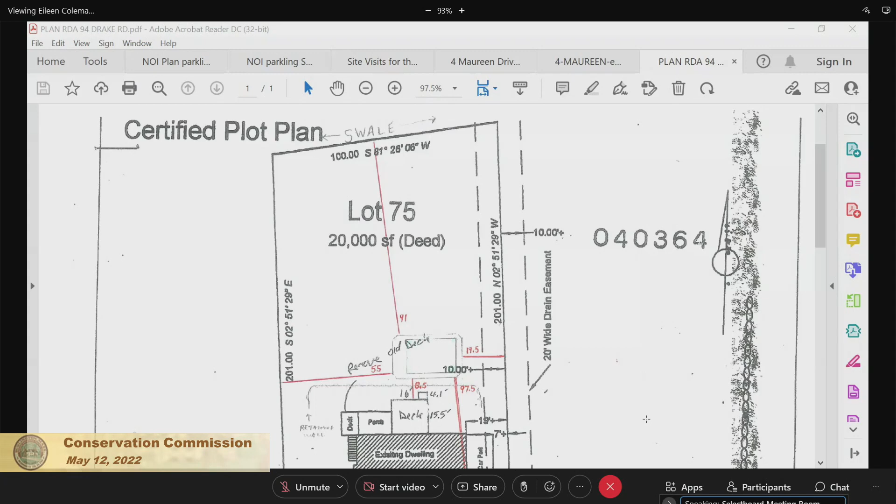My name is Peter DiBernardo. I'm with Gibraltar Pools in Topsfield. We've been in business 37 years, and we build above-ground pools. We're proposing an above-ground pool at 94 Drake, and it's going to sit behind the retaining wall. We'll bring in a machine to level the ground—it'll probably be there for about 45 minutes—and then the rest of the work will be performed by hand. The filtration system is a self-contained cartridge system, so they will need no backwashing of treated pool water into the yard. All the water will stay within the four walls of the above-ground rectangular pool.

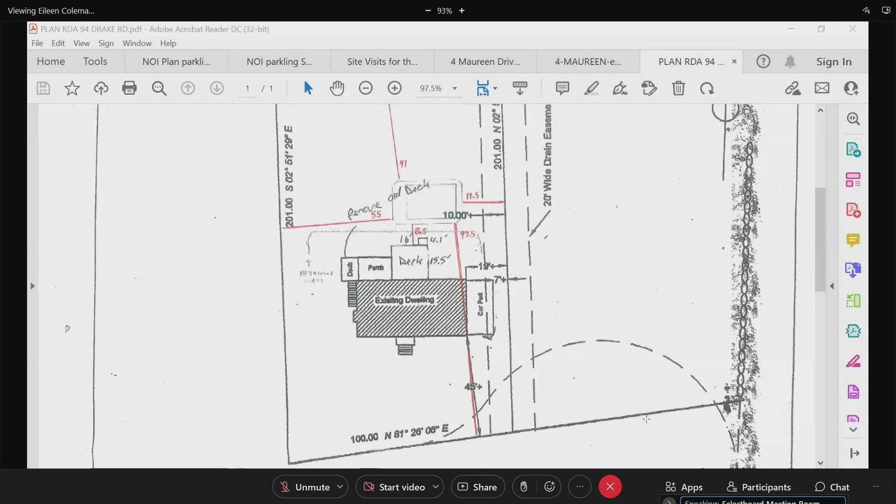Okay, thank you, good summary, very concise. John or Eileen, you have some comments on this one? A few of us were out there. So yes, we did go out there yesterday, and it appears that the wetland is not really very far beyond the retaining wall. It looks like the grading for the pool would probably be into or at the edge of wetlands. The wetlands aren't flagged, but it does appear that there's been some vegetation cut—some small trees, some larger trees—cut in the wetlands, and it looks like the pool itself would be very close to wetlands.

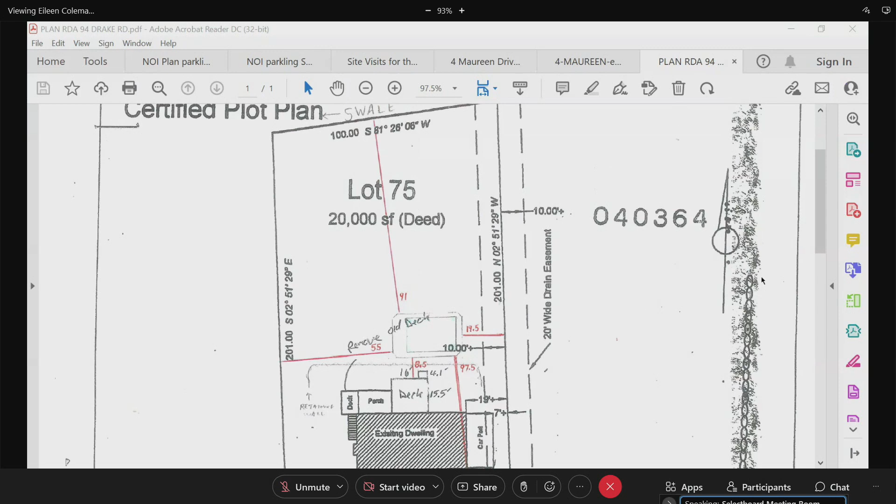All right. I was there as well, Ed was there, I believe. So, my question before we move on—it was so close to the wetlands and the slopes—did you feel that it maybe is more proper to have it as a notice of intent?

Right, well, I think the wetlands need to be flagged, and the pool location needs to be worked around where the wetland boundary is. The wetland boundary may not be a straight line across the back, it may be irregular, in which case the pool location may need to shift. But if it's within the 40-foot no-build zone, I would recommend you not approve it as a determination of applicability. If you were going to grant a waiver, it would have to be under an order of conditions. But it may be possible to get it outside the 40-foot, I'm not really sure, until the wetlands are flagged.

Okay, all right, let's see where we go with this. How about tree cutting? All right, so Kent, do you have any comments on this one right now?

Just on the pool, are you going to be doing some type of border, since it's going to be deeper? I know, because I have one at my house, so is there going to be a certain amount of rock that goes around the pool too? Is that going to be like a border?

A lot of people put a mulch border or crushed stone border around the pool, probably not more than 24 inches around the edge of the water. We've got a cantilevered safety ledge around the pool, so it would probably mimic that. I don't think it would go beyond that, so it'd be just over the overall footprint of the pool. So it'd be probably a couple feet from the edge of the water, but on our diagram we've got the safety ledge built in, so it would mimic the outside dimensions of the pool structure.

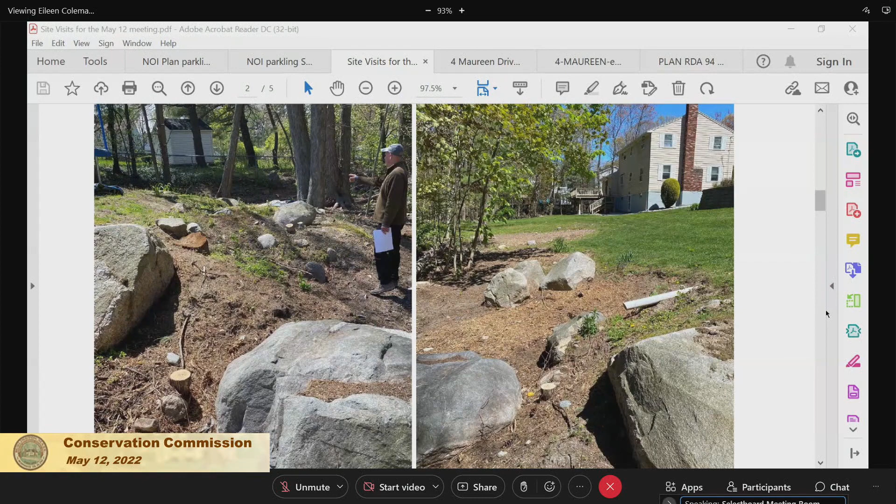It was a little bit unclear whether they were going to build up the wall to avoid any damage, or do a cut instead. And how close the cut would be, whether there'd be any damage to the wall, because the wall is like this, and then there's a slope off the wall like this - you can see it in the pictures. So there's two ways of doing it. I didn't know if they're going to bring in a machine and cut it to make it level, or split the difference with a slope like this.

I've been to the site myself, it's not too dramatic a slope for us. We'll flag off the four corners of the pool, dig in from the lowest corner, then bring the earth we dug from the top. Ours is an above-ground pool, but it can be backfilled to a certain degree, so we'll make a pad kind of midway at the slope. So you'll basically compromise, half cut the slope - it's a compromise into the middle of the slope. Yeah, okay, I see.

The top will be set back. We won't be anywhere near the retaining wall, so that won't be compromised at all. That makes sense - not only on that side of the pool, but on all sides, and on the side next to the retaining wall, the edge of water or pool wall will be another 2 feet away from that. So the edge of my safety ledge is what will be closest to the wall, then you have another 2 feet. That retaining wall is there to stay - we won't undermine it at all.

Okay, got it. Sorry to interrupt. No, it's okay, I appreciate the explanation since I wasn't there. The other question I have is, as far as a 40-foot no-build, does an above-ground pool like this require a building permit? Yes. Oh, it does, so that would certainly take effect then. Okay, so then I agree, it should be a notice of intent and the flagging of the wetlands.

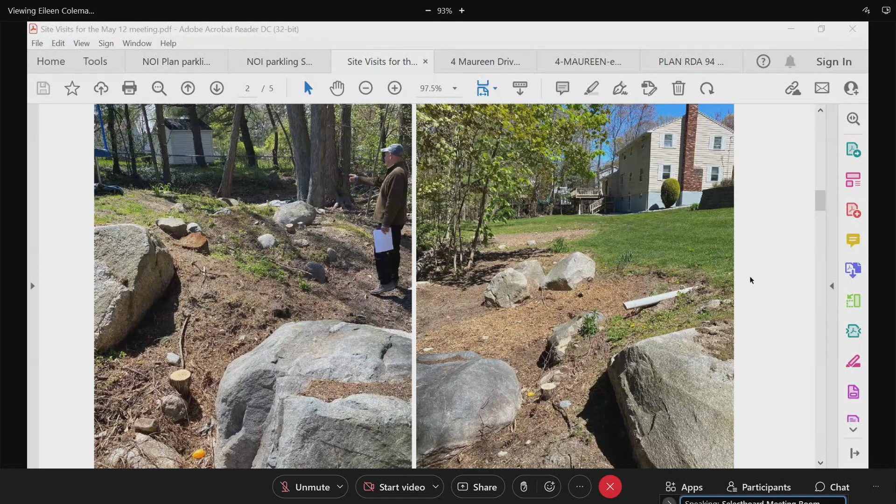If the wetlands get flagged and the pool is proposed to be 20 feet away, I'm not sure the Conservation Commission would approve it. They have a 40-foot no-build, and you'd be in the 20-foot zone. So it's probably premature to talk about mitigation until you know how far the pool would be from the wetland. But that's something for the owners to think about.

I'm sure that's something they would agree to. If we had the proper distance, we wouldn't need to be here for a conservation permit, obviously. That's right, that's what calls for it. So I don't know if you're saying that if it's 20 feet, it's a definite no.

I wouldn't mind continuing to the next meeting and hiring somebody to flag the wetland. That wouldn't be a problem, but much beyond that I think it wouldn't be an easy thing for the homeowner. We're happy to continue to the next meeting, and maybe they can get someone to take a quick look at it.

So if a wetlands person is hired to flag the wetlands and we come back to the next meeting, and it's 20 feet or 25 feet, do you think they might get an approval at that point? Or would it then be a recommendation to do an NOI?

The 20-foot zone, first of all, if it's in the wetlands, then it's not likely to be approved, obviously. The 20-foot is called no-disturb, so you're not allowed to disturb, and it would be questionable whether we'd even grant a waiver for that. The 20 to 40 foot is a no-build, and there we might grant a waiver, in exchange for a few more trees planted or something like that. If it's more than 40 feet away, no waiver is necessary and there's no issue. So it's that 20, 40, and greater distinction that matters.

The best thing is to continue to the next meeting. We'll get it flagged, I'll submit it to Eileen, and then I'll be back. I think that's the best approach. So, do we need a motion to continue? Yes. Is there anyone in the audience for 94 Drake that would like to say anything on this?

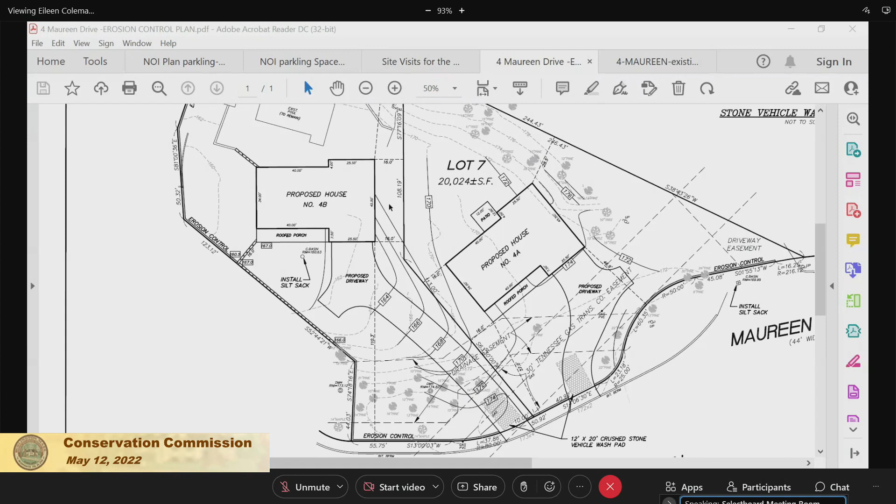As we discussed yesterday, regarding existing drainage on site, we did a little more investigating, and all the existing drainage structures are bottomless with stone underneath the dry wells. We're possibly proposing to keep the existing drainage in use with the new driveways, because we're decreasing our runoff by almost 27%, from 19,105 to 13,900 square feet. So we're decreasing runoff quite a bit.

That's the total for the 2 lots? Yeah, existing runoff on this site now is 19,105, and with the 2 new proposed houses and driveways we're gonna be at 13,900. Because we're gonna try and save the existing in-ground pool on one of the lots for one of the houses. Okay, good, thank you.

John or Eileen, one of you want to give us a rundown on this one? Well, only me, and I don't have very much to add from what Tim said.

There's one large existing house on a very big lot, and he had enough room to split it into 2 without going through a formal subdivision process. As Tim described, he's proposing to reduce the impervious surface by a lot. My main concern is that he's not proposing any additional stormwater management. As he said, the existing system appears to infiltrate, so maybe it isn't necessary, but I think that's something we need to consider.

That's about it, so it's a standard stormwater permit obviously under your hearing. Okay, all right. Ed, why don't we start with you? Do you have any comments on this one?

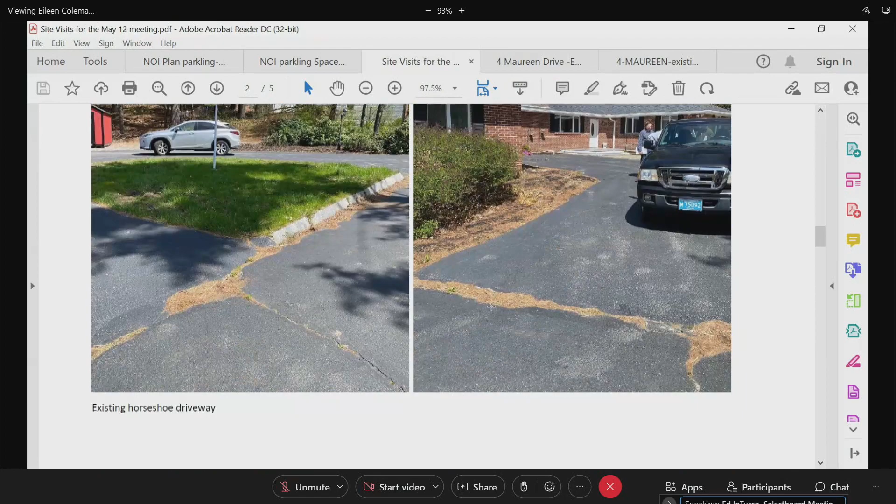My first impression was clearly to see that house go that's there, it's a beautiful home, a lot of history probably goes with that. We heard some of that already. But overall, I was impressed with the drainage and everything that was done early on throughout that whole area. I'm pretty much happy with all the work being done in preparation for this, but maybe the drainage is the only thing that would be the ultimate concern: do we go with what's existing there, or do we improve something on that?

Okay, next is Don. Yeah, I don't have any further comment, it looks doable.

Okay, Kent. Sorry, hard to ask about the drainage - what about trees, is there any more trees being taken down? Not a lot, we have a few dead pines in there, and there's a gas easement that runs through on the street. We'll probably take those, but anything along the street, is everything staying as far as a buffer goes, from probably the edge of the road, probably 30 feet in.

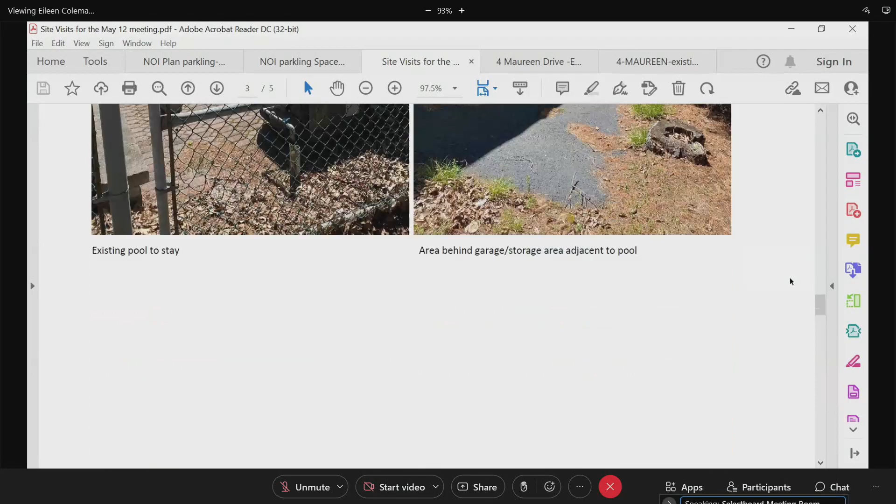Yeah, I took a drive down there today, there was a good chunk of it - all the trees as you start going around the right side? All that's staying, nothing's getting touched on that side. They're all staying, the ones on the right side? Yeah. And the ones in the front are staying too? All the ones in the front, except for I think 2 dead pines out in the gas easement.

So on the proposed plan, I see all these trees - these are all things that are there now and they're gonna stay? There's maybe 1 or 2 on the very far right, on lot number 7, maybe a couple small pines and maples at the bottom of the slope, but we're trying to stay away from the slope completely, so we're not regrading or getting into that slope at all. Trying to leave the grades pretty close to existing - no major cuts and fills.

All right, as you can see from the pictures, it's pretty bare on the inside because there was so much impervious in the house, as it is.

Bill? We did have the drainage system cameraed also. And everything seems to be in pretty good shape. We have one cracked pipe that goes back to the existing house, which we have to cut and cap anyway to run new pipes into it. So anything that needs to be cleaned or repaired, we're obviously going to do it. Even on the drainage system on the street, if it needs to be cleaned, we're going to clean it. I'm not sure if it's been cleaned in the last 30 years, to be honest with you.

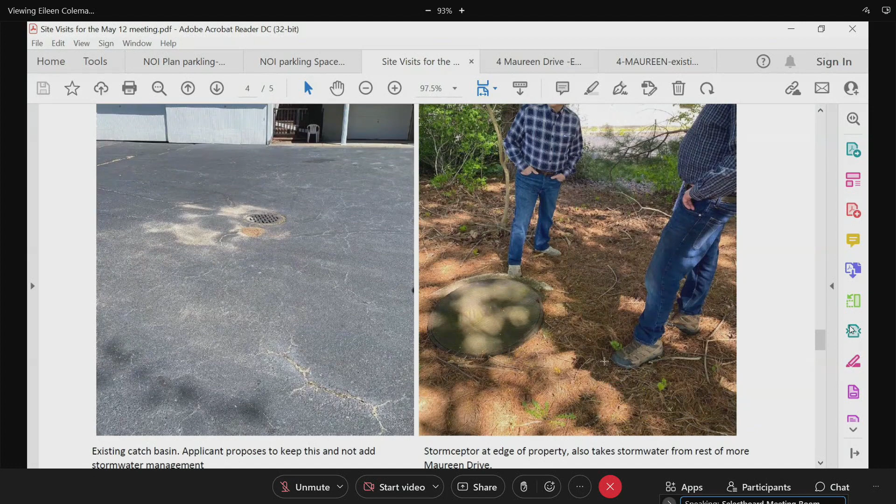All right, Bill? I'd like a little more detail on the drainage. So the two houses, the rooftop runoff is going to do what?

We have two existing dry wells on site that take the existing driveway and roofs, and we're basically gonna run the two new roofs and driveways into those dry wells.

And I see there's a catch basin on site as well? Yeah, that one that's in the driveway, that's basically a big dry well in the driveway. So we're proposing to use that one.

And then there's another one further down, and there's also another drain manhole. There were two different subdivisions here, one in '76 and then one in 1991. There was a drain manhole in front of the house that got turned into a dry well, because that drainage easement got abandoned when they did the new subdivision in '91. Actually, that's when they put in the newer drainage system for the street. There's two catch basins that go into the drainage system for the subdivision.

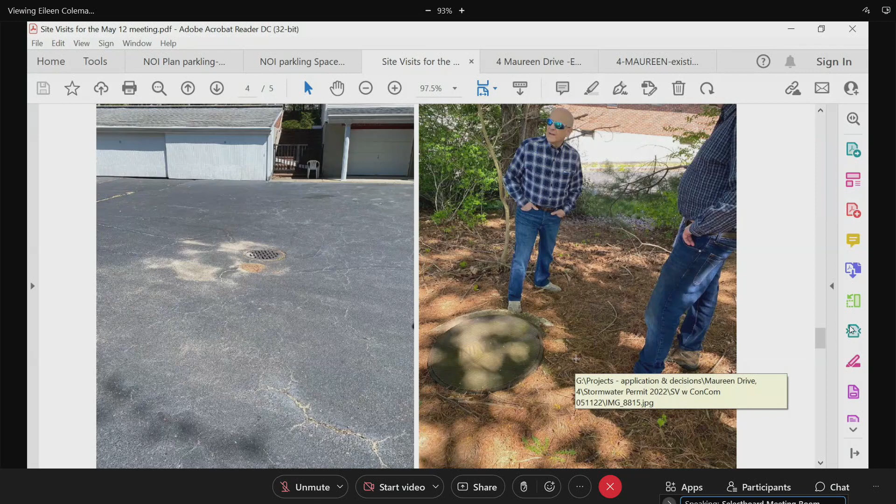So those catch basins drain out to the street, and that's what you cameraed? No, we're keeping everything on site, but the catch basins in the road, this drainage easement on my lot, is for the subdivision. There's three manholes, and they're basically oversized dry wells that catch the street water. And the existing catch basin there is basically a dry well. So we're proposing to use the existing dry wells on site for the roof runoff, so all the water's gonna stay on the site, and the site's pretty much a bowl anyway. Everything's staying on site, very little likelihood of anything flowing out.

Is it clear where the one for this lot is? Where is the catch basin here? I can't see the second catch basin. We don't see a second catch basin for lot 7. How is it being handled?

There's a drain manhole up here. Oh, that's on the street though. I'm not sure if it's in here. Yeah, there's one that seems to be on the street. It says rim 169.95, but I don't see anything for that house on the right.

We've got one at 173 that's to the left, another one at 174, and I think there's a third one. There's three drain manholes, and one of them is on lot 7. There is one on lot 7? Yeah, there's three of them. Is that on the drawing somewhere? Yeah, I'm looking at the old existing plan, because I'm not sure if he missed that on the new drainage system. That could be existing.

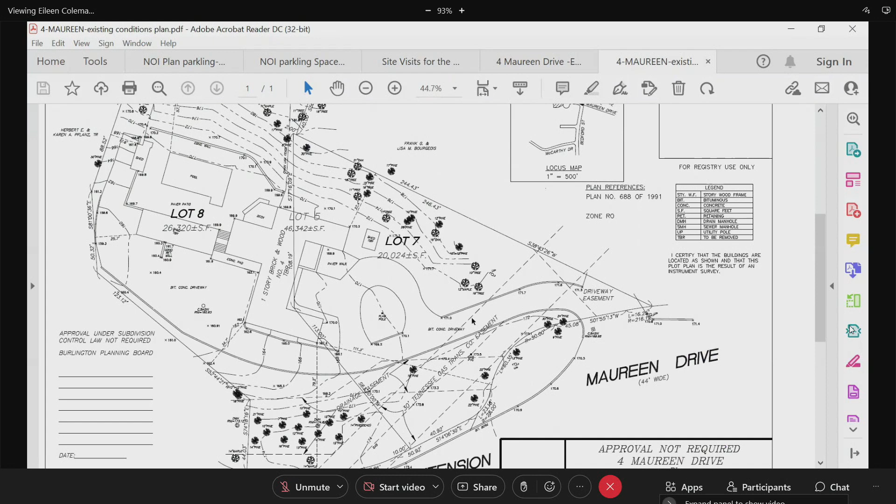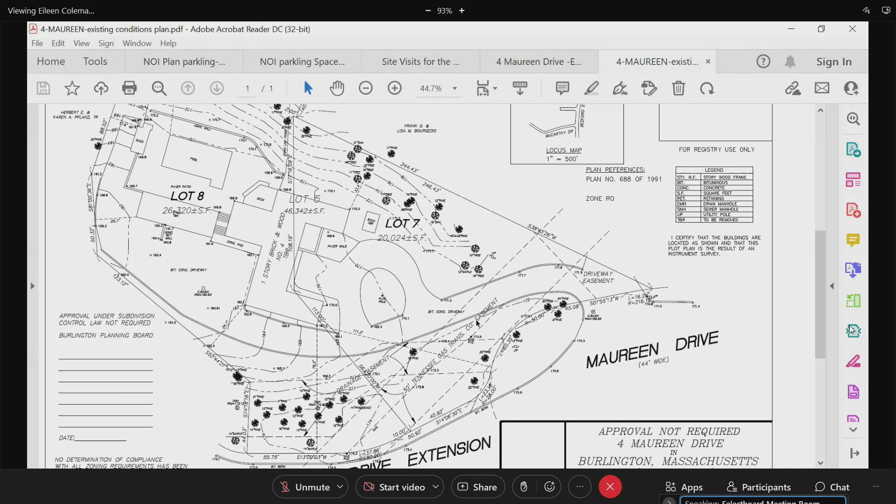I think it shows in the old abandoned drainage easement. That's the old thing. There's one here, this is the one that's there. The one on this side, I don't see anything right here. That's one right here, but I don't see anything connected.

There's a catch basin shown in front of the driveway, and then there's a drain manhole over just off your property on the left of the existing drawing.

I don't know if you guys have the subdivision plan from '91? Yes, I do. Well, if you see that little circle, it says C detail A below. That was the existing drainage easement that got abandoned, and then the new drainage easement got put in.

There's a manhole in that drainage easement, almost right in front of where the little cul-de-sac was on the driveway. But before that starts to go down, there's a drainage easement up there, there's a curving drainage manhole on the left. I found it, I think you missed that one on the new plan, to be honest with you. Drainage manhole, right here. Oh, there it is, there's a manhole there. Okay.

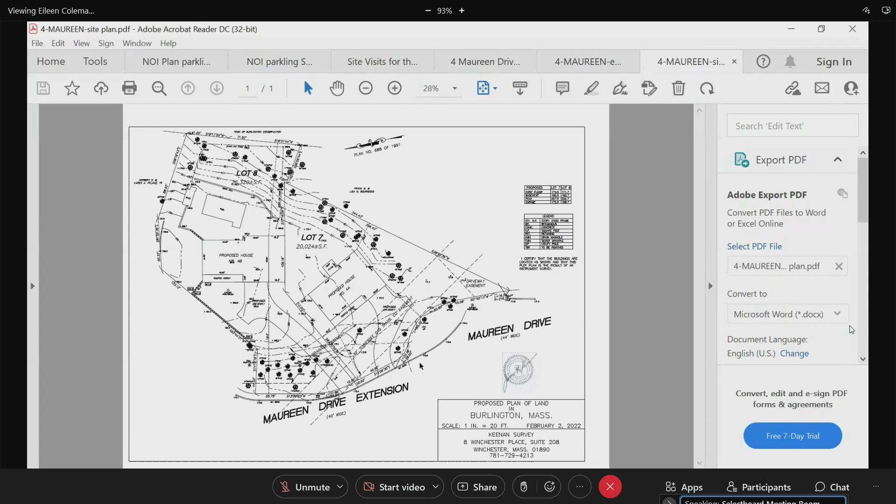Drainage easement, yeah, okay. All right, so, Mr. Quinn, here's the thing. What I think we need is a little bit more clarification, documentation, not clarification, documentation.

It would be a couple of things. I'll ask our staff or the commissioners to jump in if I'm getting this wrong. I think it would be nice to have a drawing that shows the roof leaders coming off and being connected to what. So if somebody's following the drawing, they know this roof goes here, this pavement, the grading will show the pavement, and so forth. It's not clear where everything's being connected.

I believe you. But particularly on the right-hand side, there seems to be an absence of information there. Okay, so that's one thing.

The second thing is, they did a scope and a camera. It would be nice if we could clarify which catch basins or open-ended drain manholes are infiltrating. It would be nice to have some verification from the engineer that for the amount of water going into these things, it is sufficient to infiltrate, and we don't need additional supplemental, and to have documentation on file that says that.

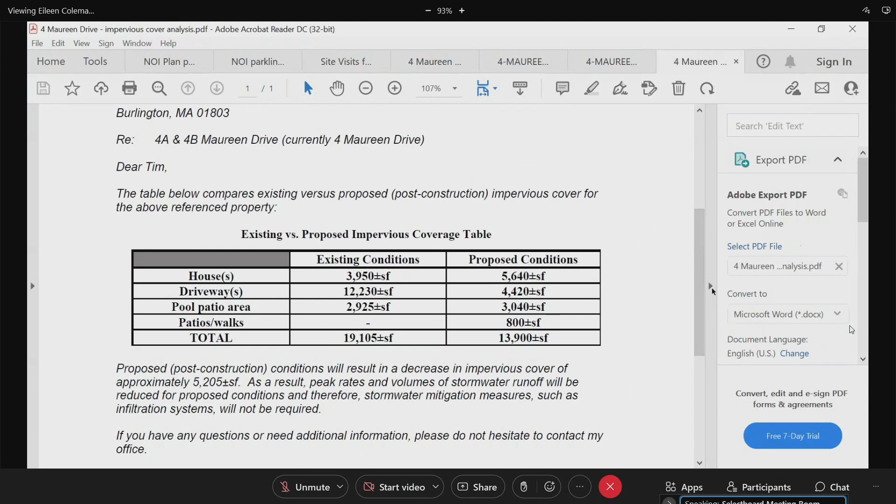I think it basically says that because the amount of impervious area is so much less, there will automatically be lower peak rates and volumes in future storm events. So since it was handling the larger amount well, it should certainly handle the smaller amount, basically.

They're really just saying that since they're reducing the impervious area, peak rates and runoff volumes will be lower than existing, which is really what they have to show. But existing is a huge swath of impervious. This has the feeling of being anecdotal, that because it's less, it should be okay.

We should have—what I would have asked for, and I don't think this is a lot to ask for, is something that shows here's how much volume is there, we measured it, and here's how much is needed. We have sufficient infiltration capacity and don't need anything additional. It'd be nice if it was a little bit more quantitative, that we have something that just says that.

Yeah, so we'll add all the downspouts, driveway drains, anything like that, showing where they're going. They know how to do it, they use dotted lines and stuff like that. And that would clarify that we don't need anything additional.

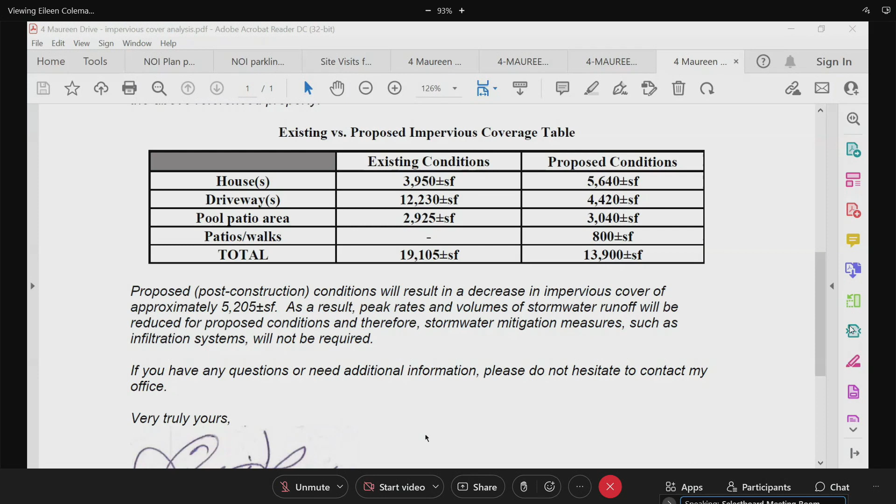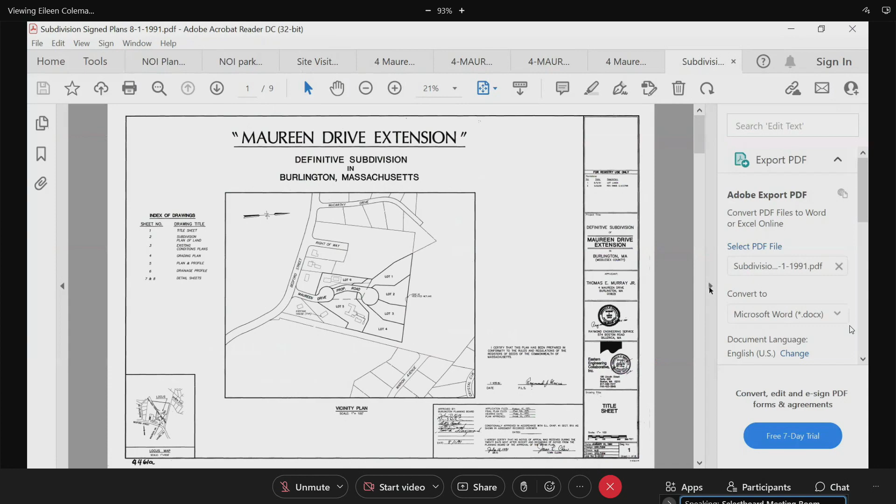And again, if it needs to be cleaned, which it probably does because it probably hasn't been cleaned since 1991, the only thing you may need on the site is to have it cleaned to restore the capacity. I was told by engineering that it is maintained by the town, but we can't find any documentation for maintenance records, which is, you know, a comment.

So if it needs some cleaning, we can clean it up. This is it, isn't it? This is the system?

Yeah, so they're really, really deep. They're 18 feet from the manhole to the bottom. There's 3 of them. They're pretty deep, a lot of capacity.

What is 18 feet deep? The drainage system, that recharge system, yeah. The manholes that we looked at, those are 18 feet from the rim to the invert.

So, does anyone have anything else that would be needed for this application?

Are you and Eileen satisfied that the erosion controls look set up in the right locations? Well, I didn't really look very carefully at that, but we'll say where the erosion control should go.

I just did have another question, if that's okay? Go ahead. Anywhere that it's not impervious, are you just proposing to put in lawn, grass? You're not doing any extra plantings, no shrubs, you're just leaving your buffer?

We're going to leave the buffer along the street, and then possibly something where that gas easement's wide open, may put something in there, but I think it's limited to what we can do on the easement, because they seem to go in and cut everything down. They clear cut the easement, but probably maybe some arborvitaes on the lot line separating the 2 houses.

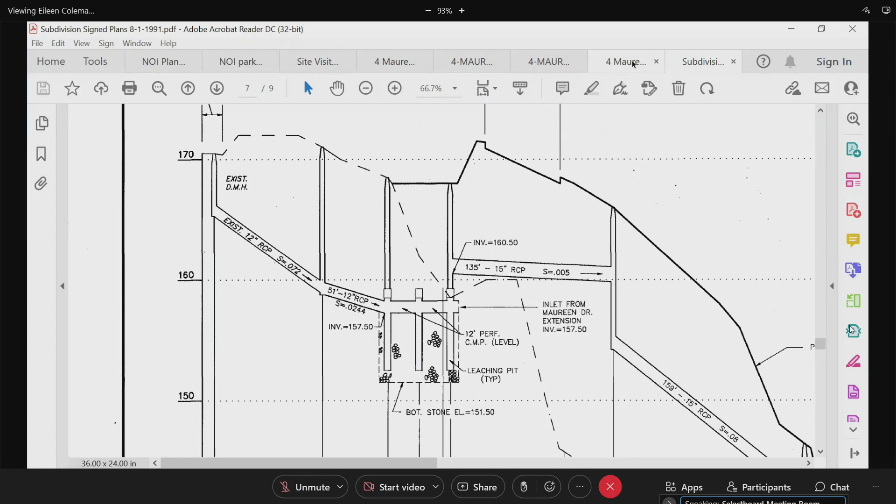Yes, on another topic, how are you going to heat these houses? Electric heat pump, solar, what are we going to do? Step into the 21st century? Good question.

Probably definitely no natural gas, because it's not readily available. Right now the existing house is on oil. So typically, if I do a new house, there's no natural gas, we go propane. But I just recently built my own house, and I put in heat pumps, and they work pretty good, as long as you spray foam everything and insulate tightly.

Massachusetts is already talking about an initiative to get rid of 1 million houses that are on natural gas. You're condemning people to a system that's not going to be very viable for a long time if you put in natural gas.

So I would recommend, if you can swing it, to put in the heat pumps. They're very, very energy efficient, lowers your bills quite a bit. I think it would help sell the house too. Well, people are getting more educated on the energy codes, so green is good, definitely helps, absolutely.

Okay, thank you. So, is there anyone in the audience for this project at 4 Maureen Drive? Anyone online? Yes, please come up.

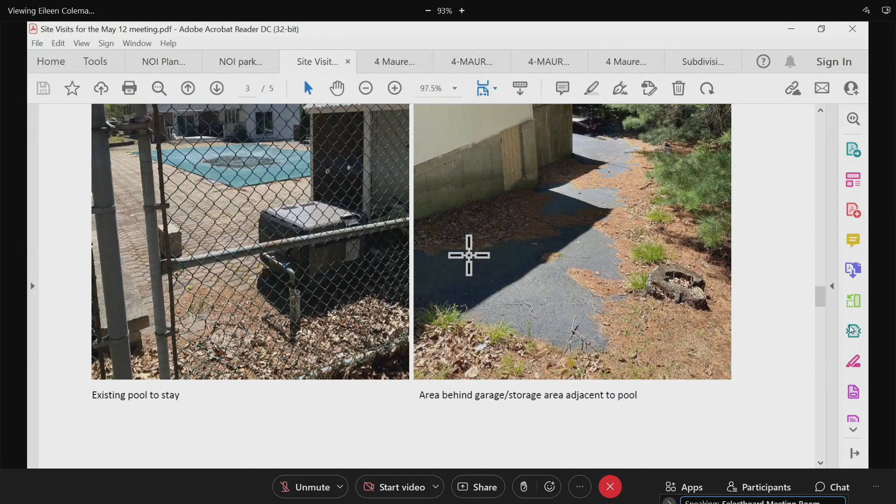Trying to see if I had a picture showing that edge, but I don't think I do. Yeah, that's the catch basin.

Sir, did you get your question answered about the cutting of vegetation and the positioning of the wall? Tim and I, I should say the builder, had talked a little bit about it. He mentioned roughly where the wall went. I wasn't sure exactly where the lot line was at that point. Am I kind of misinterpreting that?

To the left, right where the cursor crosses now? Yeah, pretty close to where all that granite curbing was running down the driveway, and then the slope started, because his road frontage basically goes all the way up in front of us, so I can't touch any of that. That's the only reason we proposed the wall—I can't go in and fill that little swale. It's his property, so that's why that wall's there, to leave the existing grades the way they are.

So the concern with the wall—say it's 5 feet, 7 feet—my lot is a little bit higher there, but I'm afraid there might be a gully there. Nobody wants a 7-foot wall right up against their property, but there might be a gully there, and that additional runoff would go into the storm drain that's not shown here, that's on my property. So that's the reason I centered the conversation around the wall itself.

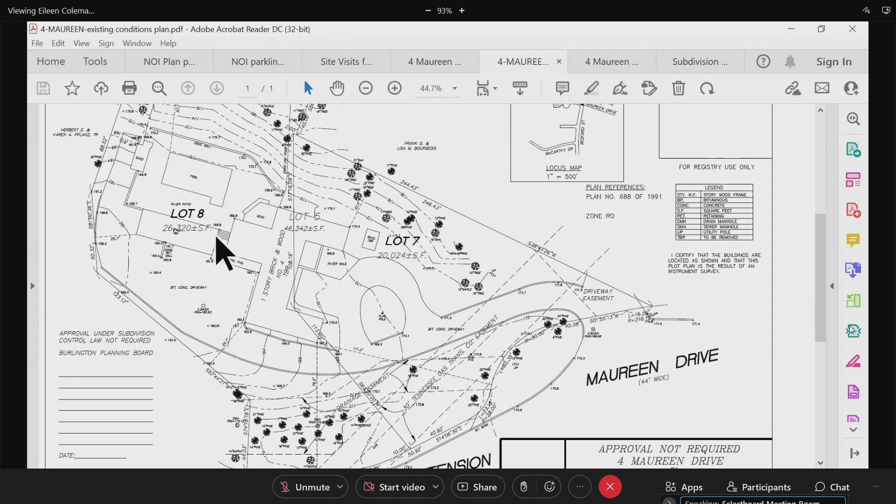All right, thank you, this is good, thank you for your comments. Is there anyone else who would like to comment on 4 Maureen Drive or has a question?

Okay, so I guess we will continue to the next meeting. What we've asked for is, one, a drawing that highlights a little better where the runoff is going, the drainage system, and some verification of the dry wells, that they have sufficient capacity after they are cleaned out, if they have to be, to handle the infiltration. Nothing more is needed.

Is there anything else anyone heard? I'd like to hear if you're going to do any plantings around your house or along the top of that wall, and I'd like to make sure they're native material. Yeah, we typically put some arborvitaes on the lot lines to separate the backyards for privacy, and we're leaving all the vegetation on the street, plus small shrubs in front of the house. Just make sure they're native plants if possible. Okay, sure, we can have that as a condition too.

Mr. Chair, I just have one question. With the two new designs, the shared driveway that's there now doesn't happen anymore, is that correct? Yeah, I'm going to try to get rid of the existing shared driveway and close that off, so the neighbor can use that only. We'll cut off access to the new lot.

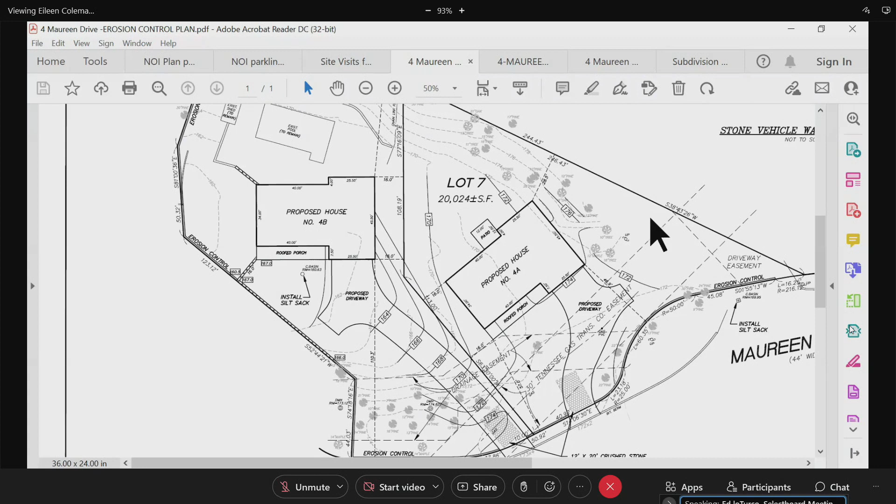I was kind of surprised that person didn't show up tonight. We had a pretty good discussion yesterday, I met him, so I think he's happy with it. He should be pretty happy, yeah.

Before you go, I'd just like to point out that parcels number 4 and number 6 are close to our conservation area. We have a trail that leaves from Bedford Street by the gas station, with a trailhead and a sign, and that's a great conservation area. I don't know if any of you have used it, but that's the access point right behind these houses. But the only real access is from Bedford Street, is that correct? Yeah, you could go in from Marion Road, but there's really no parking there.

Okay, if there's nothing further, would you anticipate that we might be able to issue at the next meeting? I think so. All right, so if we get those couple of things we talked about, I think we'll be set to go and vote a permit for you. All right, okay?

Perfect. Could I have a motion to continue the public hearing for the stormwater erosion sedimentation control for 4 Maureen Drive by Quinn Builders under Burlington Bylaw, Article 14, Section 6? We'll continue until May 26th. Is there a motion? Moved, Ed. Second?

Okay, all right, Ed, how do you vote? Yes. Kent? Yes. Don? Yes. Bill? Yes. And the chair votes yes, by a vote of 5-0. The hearing for 4 Maureen Drive is continued to May 26th.

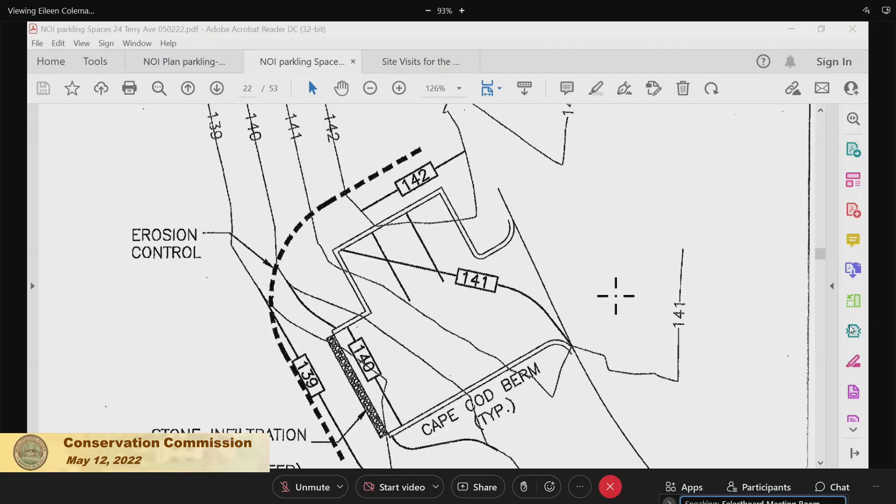Fast forward a couple years later, we are finding we do need the parking. The reason this is coming up now, after we got the certificate of compliance, is because as part of our special permit decision with the planning board, we were required to put in a sidewalk, and we're about to begin construction on that. We have approvals from the town, and we want to do that at the same time, construct the little driveway with the parking spots at the same time as doing the sidewalk. Had we not gotten the certificate of compliance, I think we could have done an amendment or a minor engineering change, but given the timing of it, I was advised that we had to refile the notice of intent, and so that's why we're here tonight.

It's really part of that same project, but we're just finding with the sidewalk going in, our service door is over on that side, and we have technician cars that pull up and load in parts. So we need that small area, and we don't want to block the sidewalk. That's why we're here.

Well, it's always nice to see you. Yeah, nice to see you too.

Okay, John or Eileen, comments on this one? No, that was a good explanation. This probably would have been an amendment if the file was still open, but it's not. So this parking lot, as commercial parking lots go, is a very small parking lot, not much larger than something you'd see in somebody's yard on a residential property. It's 3 cars, so the drainage design is similar to something you might see on a residential driveway.

The wetlands, I didn't scale it off, I can't remember, maybe David can remember. It's maybe 40 or 50 feet away, and the area between has an extensive area of grass before you even hit the wooded buffer zone as well. David looks like he's measuring it right now. Yeah, it's about 50 feet away from the wetland. Okay, thank you.

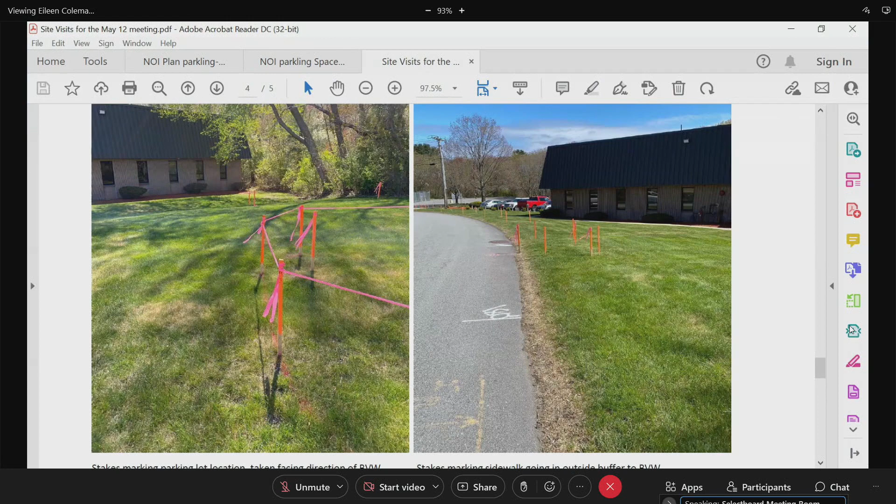Any concerns over the project? No, and the sidewalk she referred to is not within the buffer zone, so that's not shown on the plan because it just goes up to that parking lot and doesn't extend down the street towards Long Street. It doesn't go down that way, so it's outside the buffer zone.

Okay, so wetlands are this way. Ed, you have any comments on this one? No, just sad to see all the grass go, nice looking lawn. I know.

How about Don? No, I don't have any comments. All right, Kent? No comment. Bill? No, small project, I don't see any problems with it. Yeah, I don't see any problems either.

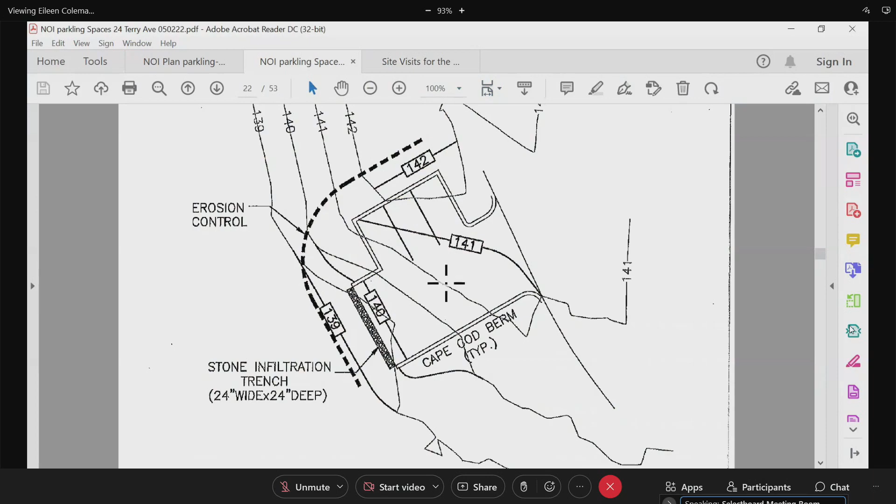We'll get to you in one minute. There is, in the wetlands though, are you aware that somebody is throwing stuff in there, there seems to be some trash and stuff? No. Yeah, it looks like yard waste, branches and stuff like that. Here are some pictures. You wouldn't normally walk over there, but somebody is using your property.

So about 15 years ago, what was the name of the company that was there before? Raytheon. Oh no, maybe it was you guys with a different name. We were there 15 years ago. Northern Business Machines? Oh maybe, I don't know. We've been there since '94. Oh okay, so that sign was put up at my request probably, about then.

15 years ago, some boulders had been put there, and it looks like somebody's moved the boulders, because now people are getting in there with wheelbarrows or whatever, dumping on your land in the wetlands. You can see a trail now that somebody made for themselves, just to dump on your land. Oh, great. Yeah, so there's a lot of yard landscaping debris, a lot of branches and stuff. Someone's using it for a dumping ground.

Do you think we could check? We have cameras, I don't know if they extend over there. We weren't aware of that at all. Well, that's far down, it's almost to Long Street probably, so your camera's probably not going to reach there.

You think, sort of as part of this project, we could ask that you could get some of that cleaned up for us? Yeah, of course. And maybe put the sign back up? Is the sign not there anymore? One of the signs is still there, but the one that's closer to your building is on the ground. Okay, yeah, we want that too, so I don't want anyone dumping anything on there or coming onto the property.

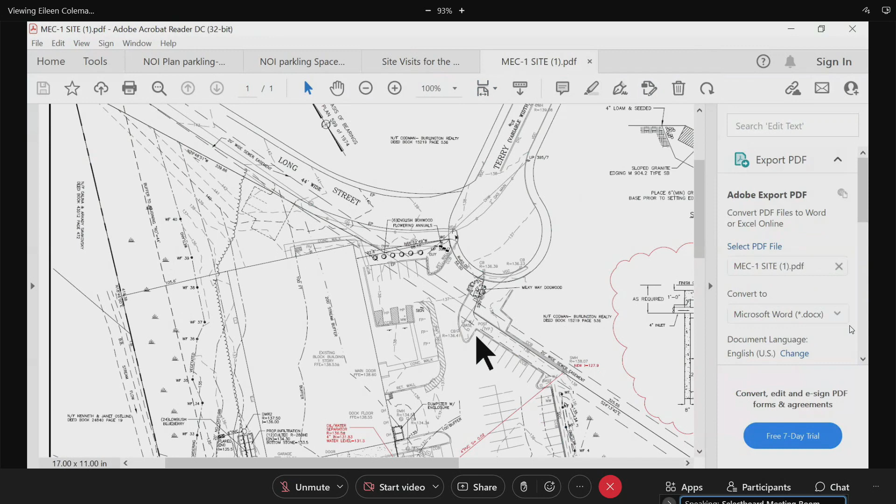I guess no one on the commission has seen it because our staff hasn't seen it. Can I look on viewpoint? Okay, again, the renderings that they showed, I don't know anything about dotted lines. I'm not an engineer or an architect, but I can tell you that on the pictures there was never a space shown. Never, because we would have fought that as best we could. And there's no need for it. What have they been doing all along? Now, all of a sudden, they want to infringe more on the neighborhood. It doesn't make sense to me.

May I respond? There's a couple of things I think are misinformation that I want to correct. The reason we haven't done the sidewalk, lights and trees yet is because we needed approval from the town to do so, and we just received that at the end of February. They said at the last meeting they didn't have to do anything. There were no conditions from the town. That's what the planning board part said. Part of the decision is that we needed approval stating we didn't need to file before the Conservation Commission, and we didn't need to do anything further on the planning board. Kristen Kastner, the planning board director, sent us notice at the end of February that we could move forward with the sidewalk.

Even though we got our certificate of compliance, we paid the town a bond for that sidewalk and construction, and that's being held until the sidewalk is done. So sidewalks are being done. What about the trees, what's the status of that? The same, everything was part of that proposal - the trees, the sidewalk, the light. Was there a proposal for trees? Yeah. When is that going in? ASAP, that's what we're trying to do now. How about lights? Same, a light at the corner of Long Street and Terry Ave, as depicted on the site plan.